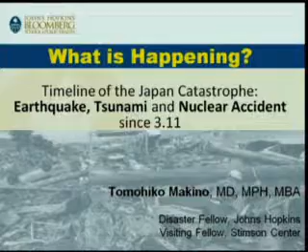I was in Australia when the earthquake and then the tsunami hit, and I was meeting with faculty from Kyoto University. We didn't know at the time what had happened, and after the meeting found, to everybody's shock, what was going on in Japan. From there I went to Taiwan, where everyone was concerned about Japan, but also concerned about what way the wind was blowing. Then I went to China and met John, and we were talking about how, as a school of public health, what are the kinds of things that we can do in these times of crisis. Clearly we have many missions, but one is to present evidence and to do research.

It's a sad irony that our mission is never more important when big disasters happen. So it was that discussion with John, and then I know he talked to people around the school about having a symposium in a relatively short time to talk about what happened in Japan. So today is that symposium.

It was a perfect storm of things going wrong, and that's I guess going to be a theme for what we're going to talk about today: a man-made disaster, a natural disaster, followed by a technological failure. We all know that in addition to the destruction of property and the destruction of lives, the psychological sequelae of people who go through these kinds of experiences are equally significant and something that we have to deal with, and something we've had an interest in the school about.

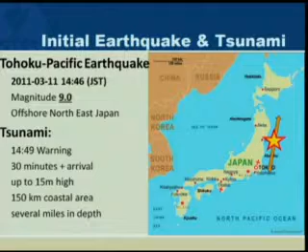This slide shows the real epicenter of the earthquake offshore of the northeast area of Japan, but surveys after the disaster revealed that the real earthquake occurred along a line, not a point, meaning the tsunami was not circular but more like a linear burst with limited attenuation, which enhanced the impact of the tsunami.

This slide shows all the aftershocks of magnitude 5.0 or more, which would be counted as a major earthquake on their own. This is still increasing, and almost once a day this type of earthquake is occurring in this area.

This shows all the epicenters of earthquakes, covering almost all the area of Japan. That distance is about 400 miles, covering all the offshore area - similar to the distance from here to Boston. So most of this large area is still experiencing earthquakes now.

This shows the figures of casualties and affected people. The death and missing count is about 25,000, which is itself very large compared to other major disasters like Katrina with 5,000, or Kobe/Hanshin Awaji in 1995 with 6,000 - still large.

But a police officer declared that the real number is still unknown, meaning so many wiped-out towns or homes exist where no one reports who is missing. So the real impact is likely much more, maybe almost double or triple.

Evacuated people now in shelters is still more than 100,000. It was up to 500,000, but most of them have since identified their own place to live, in hotels or with relatives. The shelters are still quite affected, and the numbers keep being updated because of ongoing investigations.

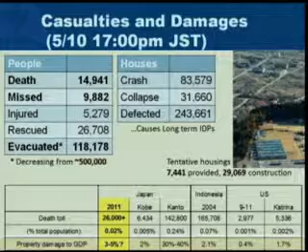This number will indicate how many people will suffer from long-term displacement and need tentative houses or shelters. Some houses are now being built in front of the affected area - the tsunami cleaned up everything, and here's new tentative housing. The numbers are still not enough.

Health issues are also common. It was a very cold winter, and the northeast area is very cold, so the first health challenge was hypothermia and deep venous thrombosis, where evacuated people didn't move a lot. After 1 or 2 weeks, tsunami lung occurred.

Tsunami lung is a kind of pneumonia caused by toxic chemicals brought by the tsunami, or certain chemicals floating around after the tsunami, because the tsunami cleans out and mixes up everything.

Infectious disease was not a focus at the beginning, but it is now occurring. There are hundreds of patients dying because of pneumonia, generic pneumonia. Influenza B is now spreading out, and gastrointestinal disease like norovirus is also spreading.

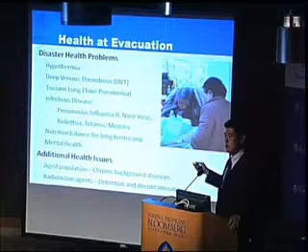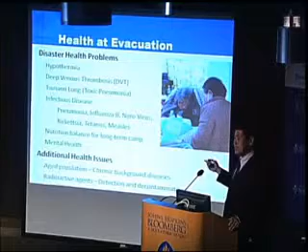These three diseases are a particular concern for volunteer workers supporting from all over Japan to the area, like tetanus and rickettsia - rickettsia being a river fever disease, also notified. Unfortunately, Japan doesn't have measles well-controlled, so volunteer workers are bringing measles to the affected area and spreading it. One overseas media reporter even got measles and kept on interviewing people. So this type of thing is also occurring.

Please imagine all the public health issues ongoing in that area. The nutrition balance for long-term camp is also an issue, meaning most relief materials are composed of carbohydrates - only rice or bread - not well balanced nutritionally. So long-term evacuees need more nutritional care, and mental health is also very important, which will be mentioned later.

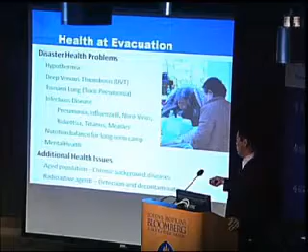There are additional health issues based on the Japanese demographics, which is very old. Japan enjoys the longest life expectancy in the world, meaning good outcomes for public health. But it also means many people are very old, with so many underlying diseases, and these people will need more healthcare in the evacuation stations.

So I hope you will have a vivid image and a more personalized understanding of how people are suffering there.

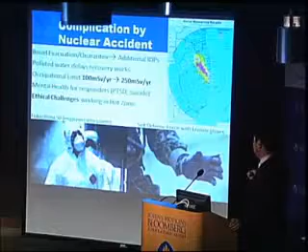And the mental health for the responders - workers, self-defense force - is also another side to be considered. There's an ethical challenge in ordering your subordinates to work in very risky areas with a lot of radiation. These technicians sent to the power plant had so much protection, but they don't have goggles to protect their eyes from internal exposure. And the self-defense personnel had broken gloves, meaning they also need more protection to work appropriately.

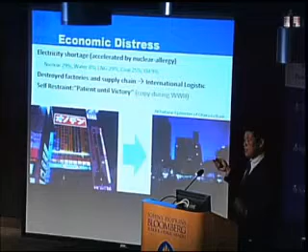And the nuclear power plant defect created a public allergy against nuclear power plants. Not only the defected power plant, but just recently, early this month, the Prime Minister ordered another power plant, located very close to an area with so many earthquakes, to shut down or tentatively suspend, which means electricity provision will be in harder shortage. Japan is now using about 30% of electricity from nuclear power and about 60% from fossil fuels. So this also requires long-term consideration.

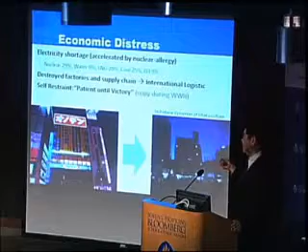Also, the climate change issue and energy security are all included. And affected areas had certain capacities and factories that supported the Japanese economy. This affected additional economic considerations, and people stopped purchasing and consuming a lot, and turned off electricity because of the shortage, and the towns became like ghost towns.

And I would like to mention the international climate. There are so many supports overseas. United States forces did a great job supporting the people, and so many countries expressed their support. There are also private donations, like from Taiwan - so many fundraising efforts - and the U.S. and Korea did the same thing. It's so nice, but on the other hand, regional security is still ongoing.

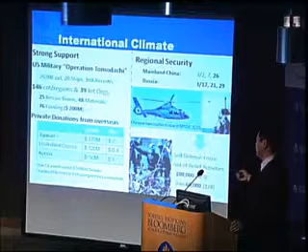So even after the earthquake, there were certain emergent military approaches overseas happening, which led to the decision to mobilize the defense force back to its original duty of defending the homeland country.

These are the big picture issues, but I'd like to reemphasize that all these issues are still ongoing, and long-term consideration will be needed - displacement or reconstruction recovery will take 10 years or more, economy and energy security remain ongoing problems, and radiological fear is another complication. Thank you very much for your attention, and please keep paying attention. Thank you.

As a brief background, this is a print done by a Japanese artist in the early 1800s, named Hokusai, which points out that tsunamis are not new to Japan. These have been going on for centuries in the recorded history of Japan. There have been multiple episodes of deaths greater than 10,000 over the last number of centuries, so it's a common event.

So what I'm here to do is take a little bit of what Dr. Makino talked about and set the stage for the true experts who will talk about details. I'm going to give you a little background about the event and what the meaning of that is in regard to the health and public health context from these events that occurred.

So first we'll talk about the event. I think you know about it a lot, so I'm not going to spend a lot of details on it. But this was not one event, it was 3 events. And so that's why this disaster is very different than most other disasters.

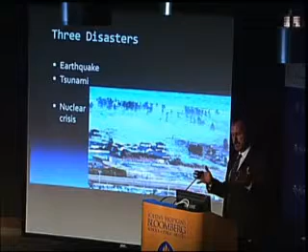If you remember correctly, I happened to be sitting up that night, working late like usual, and I was online with Google News, and it popped up that there was an earthquake in Japan. I immediately started seeing videos of buildings shaking and people running around. But within 30 minutes, the earthquake meant nothing because the tsunami occurred. And it was truly the tsunami, because Japan is pretty well prepared for earthquakes, that was devastating and that changed the entire event into one that then included this nuclear crisis, which is very unique after an event, and yet is potentially predictable in many other settings, including within the USA.

So we have to consider that there are 3 events here, and it's very hard to discern how those different events occurred and what exactly happened to them, because they've all kind of rolled into one.

So just as background, Tomo talked about this. This was a massive earthquake, not only in its magnitude - it was a Richter 9.0, a giant earthquake. But because of what it did, the plates outside of Japan are subductive plates. So the Japanese islands are floating, and the plate next to it is rising above that. What happened is the seafloor actually heaved up, literally heaved up about 5 meters, and then settled about 3 meters up.

So what that did when the floor heaved up is it pushed the ocean up that far. It pushed hundreds of square miles of ocean up meters and meters. And that wave started moving towards the shore across a very long front, like Tomo mentioned - 170 kilometers, 300 kilometers, depending on who you read. So you didn't get this massive, giant single tidal wave, kind of like you saw in Aceh after the earthquake in 2004, but you literally had an ocean that rose up and moved ashore, causing this massive tsunami.

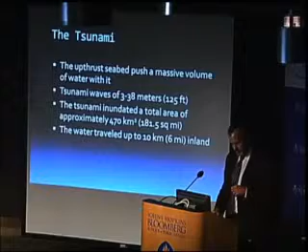The tsunami was measured anywhere from 3 to 38 meters in height, with accurate measures done at different places throughout the coast of Japan along the peninsula - 38 meters, 125 feet in height. For the most part, it was a 10-ish meter tsunami, which is also huge - it's like a 3-story building. But it was a wave, or an ocean - you saw the videos, it just kind of moved ashore and washed away everything. So it was a very unique and different event, with great ramifications.

My job is to discuss the public health and health aspects of this. I'm not going to go into the details about the nuclear aspects because we have true experts here about that. And I'm also not going to go into details about the mental health aspects.

But I want to just set the stage about what the meaning was. Depending on who you read, my numbers are very similar to Tomo's, but not exact. There was a lot of damage, a lot of deaths, and a lot more deaths to come.

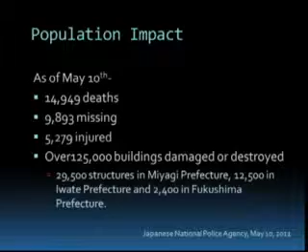The moment I saw those waves coming ashore, that ocean coming ashore, I knew that there were going to be tens of thousands of deaths. You cannot live through a tsunami, and that's what has the most important public health and health implications for us as responders, because the mortality is almost 100%.

As you can see, most of the deaths—so it's hard. One of my research questions was, how many people did the earthquake kill? Because in the Kobe earthquake in 1995, they killed 6,000 people. Right now there's no data available, at least in English, that allows us to separate out earthquake deaths from tsunami deaths.

But the closest I could get was, so far in the recorded autopsy deaths, 92% of them are from drowning. They're clearly from the tsunami. My suspicion is, given the preparedness of Japan and the distance of Tokyo and other major cities from the epicenter, that there's really going to be relatively few deaths directly attributed to the earthquake itself and not the tsunami—in the hundreds, not the thousands.

But I wasn't able to separate that out. That's important for response because it's a different response for the two different events from the health and public health perspective. So for now, we know that about 90+% of the deaths are directly due to the tsunami and not the earthquake itself.

Lots of displaced people, estimates as high as 500,000. Of course, we never know exactly—even in the U.S., no one knows exactly how many people are displaced because so many people go to live with their relatives, frankly.

Accurate counts in shelters did occur in later March, where there were 336,000 people in 2,300 different shelters. So population movements were huge.

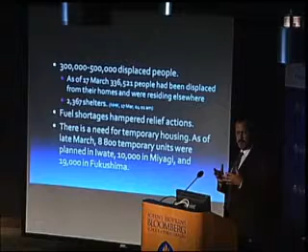The thing about this event that made it exceptionally complex was infrastructure damage. Because of the tsunami wiping out roads and buildings, but also the earthquake destroying power lines, roads, and rail lines, our ability to respond as normal responders was greatly limited because of infrastructural issues—not because of technical expertise or even availability of supplies, but because of the infrastructure damage.

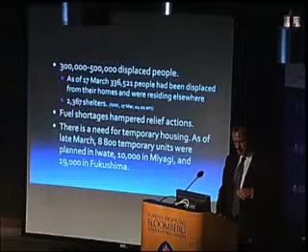There have been attributable deaths after the earthquake, which is also interesting from our point of view because we like to talk about preventable deaths. In one newspaper article I found, there were at least 282 deaths that would have been termed preventable following the event. Seems like a drop in the bucket compared to 25,000 or 6,000, but it's 282 preventable deaths that something could have been done about had we responded differently.

So let's talk about what disasters do, to once again set the stage for this discussion. Generally, we divide disaster effects into direct effects and indirect effects. Speaking as a physician, it's the direct effects that I care about—the injuries, the wounds, the infectious disease, et cetera.

Speaking as a public health person, and I've gone over to the dark side—I'm truly a public health person—it's really the indirect effects, because it's the destruction of infrastructure and resources that leads to long-term morbidity, mortality, population movements, refugee situations, internally displaced people, whatever you like to term it. It's really these indirect effects, the destruction of infrastructure, which causes the massive public health issues, which are, for the most part, truly what leads to the most morbidity and mortality that's preventable, that we can do something about.

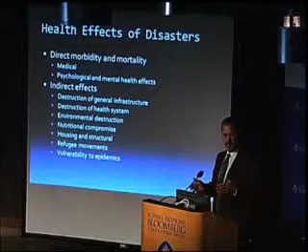So earthquakes are unique, and Haiti is a good example of that. It was estimated that 235,000 people died from the event, and there were 300,000 injuries. That's a wild guess, no one can prove that. But 300,000 injuries is overwhelming for any healthcare situation, let alone in Haiti where there's no healthcare available. In Japan, because of the building structures, the injury rate was much lower. But with tsunamis, because they come ashore, they kill everybody. So there's really limited emergent medical care needed for these events, and you have to keep that in mind because it changes our response.

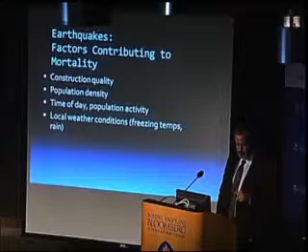So it's all about construction quality. So what do earthquakes do? Earthquakes—because if you're in the middle of an earthquake standing in a field, no big deal, you might fall down and sprain your ankle. It's buildings that kill people. And so the injuries are severe: fractures, lacerations, and all the things you'd expect in a war setting, basically. So there's a tremendous medical need from that.

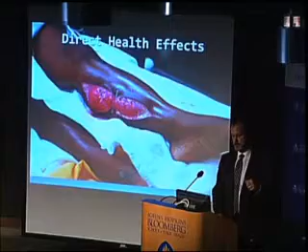The indirect effects, the secondary effects—because they cause such disruption of the infrastructure, loss of buildings, loss of critical infrastructure like power, water, sanitation, all the things essential to our civilization, essential to us to live—the indirect effects are very large and devastating also. The other indirect effect is the economic impact of earthquakes, which is tremendous. It affects the GDP, the entire economy of a country, by percentages unlike any other disaster, where you have a very small blip after it. But earthquakes, because of the infrastructure damage, cause long-term, decades-long impacts on countries' economies.

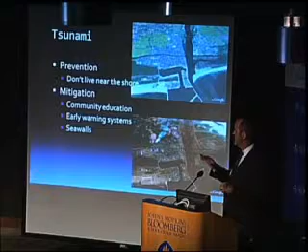Tsunamis—the only thing I want to summarize on tsunamis, and I think these pictures do it, is that you don't live through a tsunami, basically. So the prevention is don't live near the shore, obviously.

Seawalls—Japan has spent billions of dollars building seawalls. All of them, because of the size of the tsunami, were basically overrun. And maybe seawalls are not good because they cause a false sense of security. They have evacuation shelters too—it's estimated that in Japan, up to a third of the tsunami evacuation shelters were inundated by the tsunami itself. So the question is, do those things help, or do they provide us a false level of comfort and maybe make things worse, at least for massive events like this?

This was a massive event. Early warning systems clearly are a critically important thing in tsunami response. There are buoys scattered throughout the ocean. If you go to the National Oceanic and Atmospheric Administration, they have lovely maps of where all the buoys are.

This occurred 30 miles offshore. There was no chance for these people to evacuate. They were still busy after their houses had shaken and half fallen down, just trying to recover from that. And there was really almost no chance for them to evacuate from those areas because the tsunamis hit so fast.

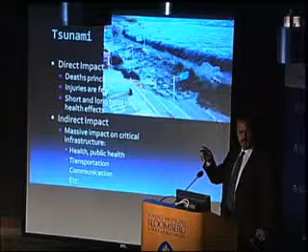So the direct impact of tsunamis is you die. If you listen carefully to the search and rescue issues over the course of the time frame, there was this famous rescue of the grandmother and her teenage grandson. Did you hear any other live rescues after this event? There really weren't many, because you don't survive a tsunami. And so the medical impact is once again limited. There's very few things that I as a physician can do.

There are lots of things that I as a public health provider can do. These are some of the types of things I wanted to briefly mention in the health response to disasters, and then we'll be done. First, we'll talk about public health. I'm not going to go into details here.

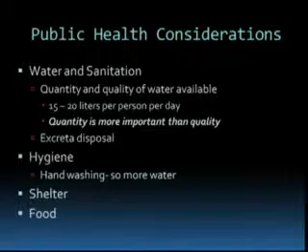This event displaced 500,000 people, essentially the same number of people that were displaced after Katrina. This creates tremendous public health issues that Japan struggled mightily with because of the transportation and infrastructure damage. For the first week or so, many of these spontaneous shelters that arose did not have access to sanitation and water and food and the things that are essential because of the lack of infrastructure and the lack of ability to deliver these things. We often talk about the need for communicable disease control after disasters.

It is a big deal in less developed settings. It's not a big deal in the U.S. and more developed settings, because the infrastructure is there, particularly immunizations, that prevent vaccine-preventable diseases, but there's better infrastructure to prevent diarrheal diseases, et cetera.

There were reports in Japan of this, however. Disposition of the dead bodies is important, and after events that kill tens of thousands of people, we ignore all of these standard rules you're supposed to use. In Japan, rather than cremate people, there are mass graves, et cetera. And so that is a big health effect, a health important thing, but we often have to violate our own precepts there because of the need to do other things.

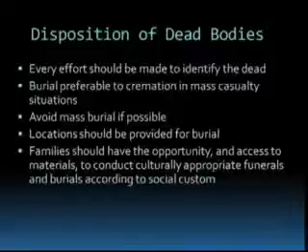I just want to touch on search and rescue. There were 40-some search and rescue teams that were deployed to Japan. Search and rescue teams from a global setting usually can't start functioning for 24 to 48 hours. The U.S. team deployed like usual, 2 teams. They made no live rescues. The ability for any global search and rescue teams in these situations to actually save lives is essentially zero, particularly after tsunami.

Haiti was a little bit different, in that there were 117 live rescues made in Haiti at the cost of about $2 million per rescue. But that was different because of the proximity to the U.S., and because it was an earthquake with structures that were kind of crummy structures, and so there were fewer deaths directly from those. And so the search and rescue issue in a humanitarian response, in my mind, is something that's not useful, and that we should probably stop, but we do it anyway.

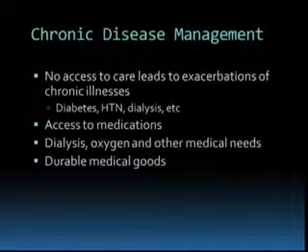So we're going to move through these. In an event like this, in an event like Haiti, it's really the long-term medical care that becomes a big issue. Once the acute phase is gone, in this case, which was very short because there weren't that many injuries, the ability to provide health care to these 500,000 displaced people, with the loss of the health centers, the doctors, the nurses, the pharmacy supplies, et cetera, is an issue that is going to be ongoing for months. Those with chronic diseases, those with hypertension, dialysis, et cetera, need care or they're going to die. And so provision of basic medical care is the most important thing after all of these disasters.

Mental health, I'm certainly not going to talk about, because I'm not an expert.

So I just wanted to summarize very briefly. Even though I am a physician, even though I'm an emergency physician, I've gone over the dark side. It's the public health issues where we have to put all of our focus, where all of our efforts after disaster have to go into. If we're going to provide medical care, it has to be chronic care. It has to be provision of primary health care services like are done in all basic levels, all basic countries. And so just keep that in mind.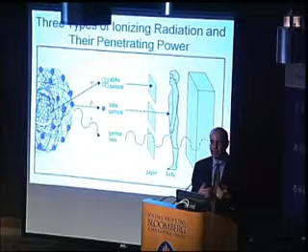So from a public health perspective, how do I think about this? If I have alpha particles and beta particles—radioactive atoms emitting particulate ionizing radiation—my key job is to keep the radioactive atoms out of my body. If I have X-rays and gamma rays, so the radioactive atoms are emitting electromagnetic ionizing radiation, then keeping the radioactive atoms outside my body is not going to do the full trick, and I need to think about reducing my exposure through distance, shielding, and so on.

So how does that then translate to the situation in Japan?

There are two possibilities for how you get irradiated: the radiation is either outside your body and impinging upon it, or it's emitted inside your body. For external radiation, where the source is outside your body, the greatest risk is from X-rays or gamma rays that can penetrate into your body.

Who's really at greatest risk there? It's the power plant workers. Tomo showed you a picture of those workers with masks and Tyvek suits, but that does not shield you against external irradiation from X-rays and gamma rays.

At one point in the unfolding of the event, the radiation dose rate inside the power plant facility was so high that 800 nuclear power plant workers were evacuated, and 50 were left to make sure that the pumps, which I'll talk about in a minute, kept operating. I see nodding heads, everyone remembers that.

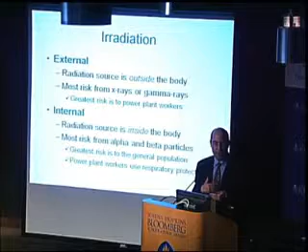Well, what about the 50? They weren't walking around in giant lead suits, right? I actually think it's amazing that hardly anyone in the media talks about those 50 who received very high doses, in essence coming as close to a suicide mission as possible to protect everyone else. So in a case like that, you really have to think about the workers.

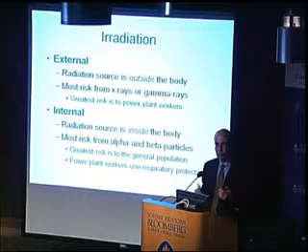I was also struck by Tomo's slide, because in the midst of an event like that with releases, a mask isn't enough — you really need a self-contained breathing apparatus or other active respiratory protection. But the Tyvek suit and mask are preventing internal contamination, which is still worth it, because the last thing you want is to walk away from the source carrying radioactivity with you, still irradiating yourself.

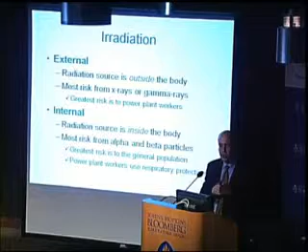But for those power plant workers, the external irradiation was very, very significant. On the other hand, in the internal irradiation scenario, where the radiation source is inside the body, I'm much more worried about alpha and beta particles than about X-rays and gamma rays.

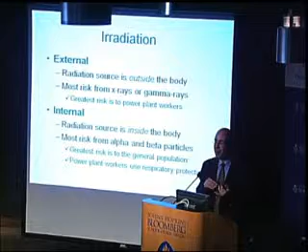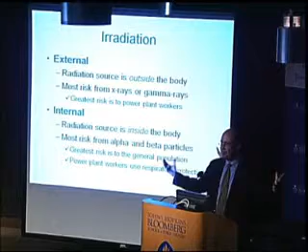The greatest risk there is to the general population, who are typically breathing it in or ingesting it. And the power plant workers, ironically, even though they're right there on site, have a lower risk than members of the general public in some vicinity to the plant, because of the personal protective equipment the workers are wearing that the public is not. So it's this kind of paradox we have to think through.

What's going to happen either to the power plant workers or to members of the general public who receive radiation doses? Broadly speaking, there are acute effects and delayed effects. The acute effects include what's called a prodromal syndrome — the stereotypical thing you hear about with acute radiation exposure: nausea, vomiting, diarrhea, fatigue, and so on. Then there's one of three different syndromes that occur acutely depending on your dose.

Here I've expressed doses in rem, a very conventional unit of dose, and you'll notice those syndromes occur at hundreds, thousands, or tens of thousands of rem. By way of comparison, every year all of us involuntarily pick up roughly, in Baltimore, 300 millirem of radiation dose.

That comes from cosmic rays, radioactivity in soil, building materials — our own bodies are radioactive, so we're irradiating ourselves, and so on. So these acute-effect thresholds are many-fold higher doses than what we normally receive.

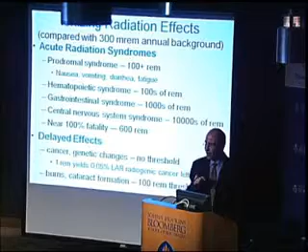From a public health communications perspective, it goes back to this notion of the word radiation and the inflammatory nature of the word itself. If cancer is the endpoint I'm worried about in terms of public exposures, and if from a public health practice perspective I cannot say there's such a thing as a safe dose, then my risk communication becomes very challenging, because the public doesn't want to hear your risk is low. They want to hear you're safe, which means zero risk.

In a conventional fossil fuel power plant, I'm burning fossil fuels, and that's giving me the heat to boil the water. In a nuclear power plant, I have nuclear fuel in a reactor, undergoing a nuclear reaction called fission, where an atom splits apart into two fission products. When that atom splits apart, a lot of energy is released. Some other nasty stuff is released as well, but a lot of energy is released. Much of that energy is thermal or heat energy, and that's what's boiling the water.

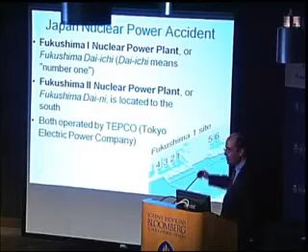1, 2, 3, and 4 — the major part of the story. We had the big earthquake. Units 4, 5, and 6 had been shut down prior to the earthquake, so that was a controlled shutdown with decay heat. The remaining reactors shut down automatically with the earthquake. That's the good news, but you still had heat.

That heat was taken away by the pumped circulating water with the emergency generators. That was good news for 30 minutes. Then you had the failure of the emergency generators.

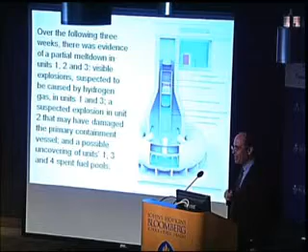Over the following three weeks, there was a partial meltdown in units 1, 2, and 3, and that slide gives some of the evidence for it. In unit 4, you had spent fuel that also became a problem because it's still radioactive — it's still giving off heat, even though it's fuel that is not in the configuration of the reactor core.

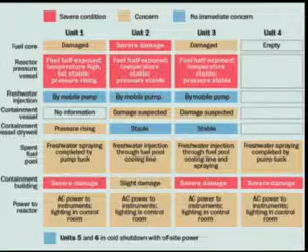So what you ended up with is a series of conditions in units 1, 2, 3, and 4 that had to do with a buildup of reactor pressure, some damage to the containment vessel itself, the containment building — that's when you're really going to get releases to the environment because you get a buildup of radioactive gases. If you have damage to the containment vessel and the containment building, that's when you have your opportunity for release into the general environment.

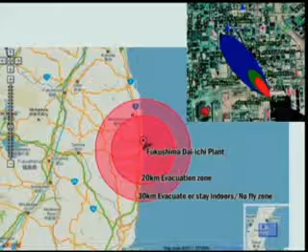You heard about the evacuations, and in fact there was a lot of controversy about what's the proper radius for evacuation, because the evacuations were over a shorter distance than we would do in this country. Part of the challenge is we always draw these nice concentric circles, but as was said with respect to the tsunami, it actually applies to air modeling with a plume. If you model the release of radioactivity into air, it travels in a very directional pattern with respect to the wind. So which direction the wind's blowing is incredibly important.

You've probably also heard that on the International Nuclear Event Scale, ultimately this was a level 7, a major accident. That's because of what happened in aggregate across units 1, 2, and 3. Of interest, the first INES rating was a 5. Why did it go up to a 7? Because there was a lot more release? No — because there was a decision made to combine the releases from units 1, 2, and 3 rather than counting each of them separately. Makes sense, I think.

Okay, what are the radionuclides that get released? Iodine, cesium, strontium, and plutonium. The big ones in Japan — iodine by far, and then some cesium. It's the iodine that got all the attention, and that's because we have some interventions for various internal contaminations, and potassium iodide is the one for iodine releases. It only protects the thyroid, and it only protects the thyroid while you're taking it. So actually there was, I think, as usual, a lot of overselling of the iodine story.

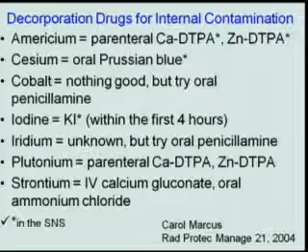Let me end by talking a little bit about perception of risk, because I think this is a key component in all disasters, and particularly in a disaster like this that involves a radiologic component. To me, the guru of risk perception is a psychologist named Paul Slovic, who decades ago basically said that the characteristics that drive human perception of risk fall into two groupings: one has to do with how dread the risk is — is it uncontrollable, is it fatal, is the situation catastrophic — and a second has to do with how unknown the risk is.

So do we know that we're being exposed to radiation right now? No, we can't sense it, and we are being exposed to radiation right now. The effects are delayed — cancer has a latent period of decades, and so on. So if you think about it, ionizing radiation has all of the characteristics — I'm just a bundle of joy, aren't I? — ionizing radiation has all of the characteristics that drive perception of risk.

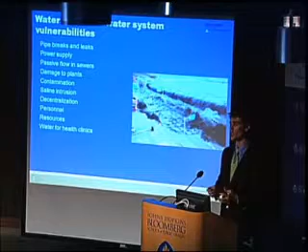There's passive flow of water in sewer systems. Sewers are gravity fed, and these are generally open systems, so during flooding situations they become in contact with surface water. There's damage to plants, there's contamination release, so groundwater can intrude into the water supply. There's saline intrusion after a tsunami, so salt water can ruin your crop fields for decades to come.

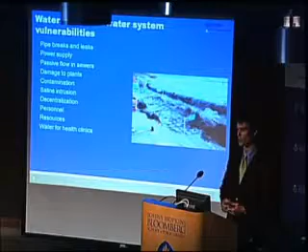There's decentralization of water systems—the way these are organized can become problematic, so whether you have one large plant or many small plants becomes an issue. There are personnel issues after any disaster in any sector, and resource limitations. Water is critically important for healthcare following this—you need clean water to do surgery, clean water for patients, etc.

So what I'm going to talk about today is give you a little snapshot of what happened after a major earthquake in 1995. There was a bit of a wake-up call. We'll discuss that in the context of what it takes to be prepared for a major event like this, give you an introduction to the water supply and sanitation in pre-tsunami Japan, what happened after the disaster—post-tsunami—and some data gaps and opportunities for Johns Hopkins.

There was a major earthquake in 1995 centered around Kobe, a major city. The reason I bring this up is not because it was a big earthquake with respect to the numbers of people who died—there were 6,300 people, which is a lot, but still much smaller than today's event.

What I wanted to focus on was that there were 3,300 pipe breaks following that earthquake. This was an unprecedented number of breaks within Japan, with a really high breaks-per-kilometer rate. What this led to was the inability to fight fire—so you have these coupled problems.

You have the problem of water supply, which leads to an inability to fight fire. There was a lot of loss of homes, $100 billion in property damage, and a long time to recover following that event. So I want to focus on the timeline to recovery following this 1995 event.

Electricity was up after 6 days. Telephones, 14 days, not so bad. Gas, much longer, 84 days. Water, 3 months—it took 3 months to get full water coverage throughout the city and surrounding areas, and this also applied to sewers, about 3 months. So this was a bit of a wake-up call that we weren't really prepared from a water supply perspective to address these disasters.

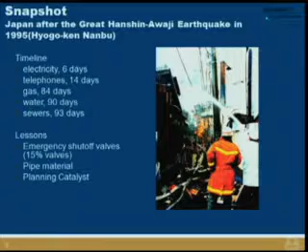And so all of those little mini lessons developed into this idea that there needs to be a better nationwide plan. And so this was a catalyst for action. Okay, so all that culminates into a water safety plan.

The water safety plan is the dominant management tool for the water supply across a country. So this is how countries are starting to look at their water supply from a daily basis as well as from a disaster preparedness basis.

The water safety plan is a comprehensive risk assessment and risk management based perspective to protect water from the source to the consumer. So on a daily basis, you look at areas which may be at a higher risk for Cryptosporidium, which is a pathogen, and you have a different plan to control the water supply in that region with respect to a region that doesn't have a problem with Cryptosporidium.

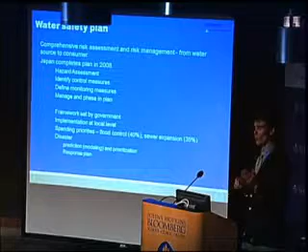Japan completed their water safety plan in 2008, and the basic components are, very simplified, to identify the hazards, so that would be things like earthquake, where are the pipes more vulnerable, where the earthquake's likely to happen, and which pipes are going to break.

Then you identify control measures. So that would be things like we're going to replace those pipes, or we're going to have bypass valves or something like that, so that if this pipe breaks, this other one's still working.

And then you define monitoring measures to make sure that the system is working. You manage this plan, you implement it, and you iterate. So it's kind of this iterative process.

That framework is set by the national government, but it's implemented at the local level. And there are many players in between, which is what we're going to see happen after the earthquake and tsunami.

And so the spending priorities right now in Japan are things like flood control, it's about 40%, and sewer expansion. Japan historically has a low sewage network coverage, so there's a lot more home treatment systems. And about 35% of the national water budget is related to sewer expansion.

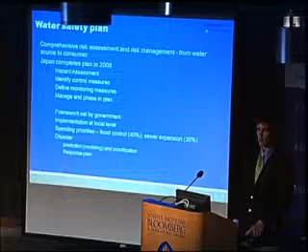From a disaster perspective, they're most focused on prediction, so that would be modeling where the disasters will occur and prioritizing the changes to water and sanitation infrastructure based on those results, and developing, again, the plan.

That's the software. Okay, so here are just some examples of things that you can do to develop better hardware to deal with disasters. So for an earthquake, seismic capacity improvements. So that's the obvious stuff: pipe material, joint material, structural improvements to the facilities. So that's the treatment plants themselves.

You also want, and I think this is clever, a seismic resistant power supply. So you have this redundancy built into a cogen plant. You have your natural gas, so if that system is up and running, you can still provide water, but you also have tapped into the greater electric grid. And so many water plants have developed their own cogen electric plants on site.

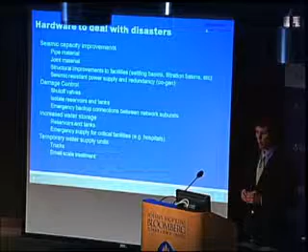There are also damage control measures. So the emergency shutoff valves that we just spoke about. You can isolate the different tanks and reservoirs so that they aren't all connected and they don't all drain at the same time when the system starts to open up. And you want to have emergency backup connections, so that's redundancies in pipes. So if this neighborhood has one pipe that goes into it and that pipe breaks, none of those people get water. So they like to build in these sort of redundant systems.

We also increase water storage. So that means bigger reservoirs, more tanks. And it's critical to put water in very important facilities like hospitals. And that's just a special case of increased water storage.

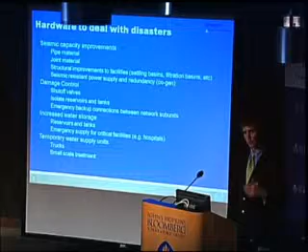The last thing I wanted to mention is temporary water supply units. So in Japan, they used a lot of water trucks. But in other places, you can use small-scale water treatment.

Before the tsunami in Japan, they have a lot of pipes. This is expected because it's a highly developed country. There's 610,000 total kilometers of pipes, 16,000 plants across the whole country. Unfortunately, seismic resilient materials are expensive, so only 6% of pipes are ductile iron and 3% are steel, because steel is a lot more expensive than concrete. So only 9% of the pipes throughout Japan are resistant to earthquakes, and the entire country is at high risk for earthquakes.

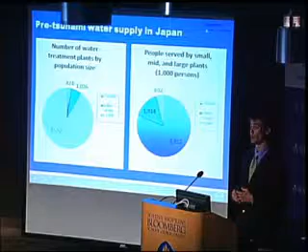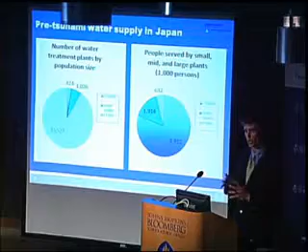The capacity of the reservoirs is going up across the country, and the majority of plants are small scale, but the majority of people receive their water from large plants. Shown here is a pie chart describing who gets their water where. On the left, we see the number of water treatment plants by population size. This light blue area, 15,527 plants, are treating populations between 100 and 5,000 people. So you have a lot of little plants scattered around everywhere, and that's to be expected. And you have a very small number of plants which treat large populations - only 424 plants provide water to 50,000 people or more. This pie chart is a little bit skewed towards the small distribution side. The U.S. would have bigger chunks in the middle and at the top end, but still most people are getting their water from those big plants. If you look on the right, you have about 10 million people who get their water from those 400-some-odd large plants. And that's something that becomes important in disaster planning.

The pre-tsunami sanitation situation falls under the purview of a different department, and so there's a real data gap about what's going on in the sewers because these two departments don't report their information in the same way. 72% of Japan has sewer network coverage, compared to about 84% in the U.S. This is predominantly a new phenomenon - in the last 10 years, Japan has risen from below 60% to over 70% sewer coverage. That means all of their pipes are much younger - the average age of the sewer system in Japan is 16 years compared to 40 years in the U.S. That means we're going to be spending a lot of money fixing these pipes because they're going to be breaking and we're going to have problems with our sewers. There are 410,000 kilometers of sewers in Japan - again, that's a big system. And most of these, even though they're new, are still low seismic capacity.

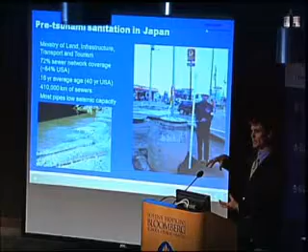Here's just sort of two extremes of what can happen following an earthquake. This is a 2004 earthquake, and you see a manhole here has lifted. These systems get jostled around during the earthquake, and this is very likely to be fractured underground. The other situation is that water can flood over the sewer system, and there's a manhole that has surface water directly in contact with the water inside of the pipes. So that's a public health risk right there.

In comes a tsunami. Again, this is the area we're interested in.

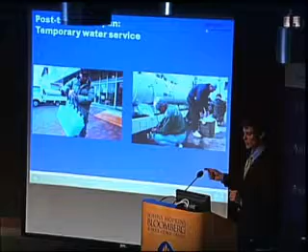You have 300 trucks ready within 4 days to provide water, and within 20 days you have some 500 water tanks ready to go. It's interesting to note that not all of them are in service, and this reflects the dynamic nature of the problem. As trucks would go online in areas that needed water in the beginning, and then their normal supply would come into effect, they wouldn't need the trucks anymore. So you had this very dynamic situation.

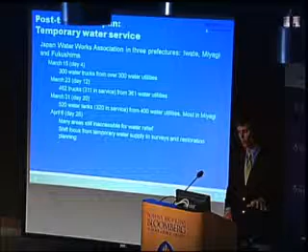By early April, there was a shift in focus from this temporary water supply to surveys and restoration, even though there are still some areas that are inaccessible for water relief.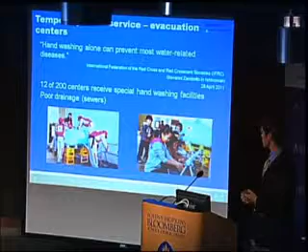The third temporary water service that's critically important is water within these evacuation centers themselves. Tom had alluded to this, that there was an outbreak of diarrheal disease in some of these facilities. The reason was that there wasn't sufficient hand washing going on, because the sewer systems were backed up and water was not being drained properly. So the Japanese Red Cross promoted hand washing as the intervention, and developed these small tanks to pilot a hand washing station for children so everyone could wash their hands and try to control the disease. One thing I was really interested in figuring out was how widespread this problem actually was, and whether or not this was an effective control measure. There's a real lack of information coming out of some of these sites.

Okay, temporary water service - I showed you some examples of how we can handle that. We want to restore the normal service, and that involves getting our pumping stations back online, fixing pipe breaks, and so on.

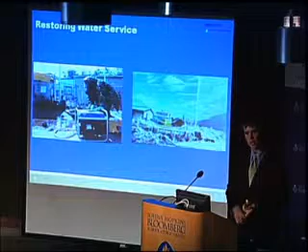On the left, we have a pumping station that's inundated with water, and this guy here is from the U.S. military. He has a small generator and he's trying to pump water out of the surface water. The picture on the right is a pipe burst - it's a surface pipe, there's water spewing up into the air. It's coming down and it's cold, so it's freezing, and that presents all kinds of challenges in trying to get that leak fixed.

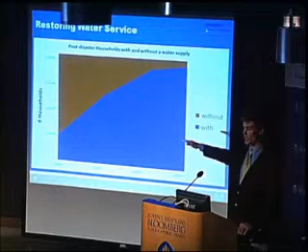Okay, so this is a real success. Remember, 90 days following the earthquake in 1995 - within a month, you went from a situation where 75% of households did not have water in the affected region, to over 90% of households. That's a really quick ramp-up phase, and that's in large part due to this shift in water safety plans and a focus on disaster response, trying to get these different teams coordinated in a more consistent fashion.

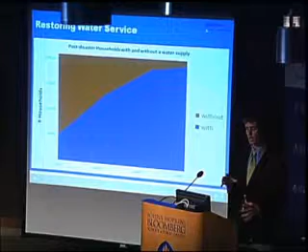So although all of these homes have volumes of piped water, it's not clear how pure that water is right now, for two reasons. One is that during the pipe break event, there can be intrusion of groundwater into the pipes. The other is this problem with radioactive contamination in water.

As these households were getting brought online, there was the discovery that there was radioactive material in their food and water supply. We've already spoken a little bit about this, so I'm not going to go into great detail, but this radioactive iodine and cesium, which was released, gets trapped into rain particles as they come down and are brought into the treatment distribution system.

This becomes a concern if the concentrations are above 300 becquerels per liter of iodine, or 200 for cesium, for adults, and 100 becquerels per liter for infants.

Tokyo responded to this by distributing a lot of bottled water. This is not a sustainable solution, but it was an emergency plan to try to deal with something that was unforeseen at that time.

The tap water restrictions, which took place during the first part of the tsunami, were lifted within a short amount of time, and the last one was lifted yesterday. In the 80-some-odd communities where they found radioactive iodine in the water, most restrictions on drinking were lifted within the first few weeks, and today all of them are lifted.

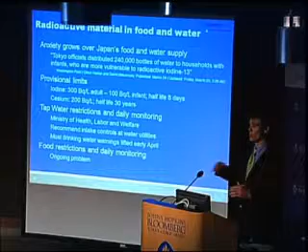The other control measure to deal with this radioactive iodine problem was to either cover or shut down the water treatment plants during rainfall events. And it rains a lot in Japan at this time of year, so that becomes a real problem.

The food restrictions have a similar origin. This atmospheric release of radiation gets into the water supply, gets taken up into growing plants and incorporated into their tissue. So this is an ongoing problem.

Just yesterday they found new sources of radiation in the bamboo shoots and mushrooms in one of the prefectures, and previously there have been contaminated apples. This is something the government is doing a good job of monitoring and reporting. From a public health management standpoint, at this stage, given that radiation is released into the environment, monitoring the food directly is the best approach.

I'm going to conclude with a few data gaps and research opportunities, because that's what we do. The Global Water Program at Johns Hopkins — most of us here are academics — I think there's a lot of room to discover new solutions related to these key data gaps.

One is water-related disease. There wasn't extensive reporting yet of chronic illnesses, or diarrheal illnesses and things like that relating to the water supply, or contaminants in home taps. All of the data I was able to find were water quality data coming out of treatment plants, not out of people's homes. Between the plants and the home, there's the risk of additional contamination.

What we try to do is three things. I want you to think about three words - you can write these on the back of your hands. This is what my field is all about. It's pretty pathetic when I stop and think about it, but this is what I do. Stabilization - we try to stabilize, to keep things from getting worse. Mitigate - can we do something to make it a little bit better? And facilitate - facilitate access to the next level of care when such things are truly available.

Oh, okay. I don't know why it's doing this. It's just kind of neat, I guess. I hope it's not going to keep doing this.

What is the state of the art in disaster mental health? Very similar to physical health. I want you to think of a continuum of care - it's not a one-off-the-shelf implementation, not just establishing a crisis telephone hotline. And I cringe when I hear this, but every time something happens, certainly in North America, you'll hear the line that grief counselors were dispatched, and I get this image of Winnebagos with little yellow smiley face flags heralding off to the site. That's not exactly what we do, but telephone hotlines certainly are part of the continuum of care. We also talk about mobile crisis outreach, holding town meetings, surveillance, assessment in the field, and facilitating access to the next level of care, whatever that may be. So a continuum of care is a very important concept for us.

I want you to think in terms of stages of disasters. Part of the art form when we deal with any continuum of care is choosing the target population and choosing the right tools for that target population. For example, think of segmenting a target - we have school children, people working at nuclear plants, civilians, farmers, people who work in cities and on farms. They may be arguably distinct and separate target populations, and different tools will be used for different populations.

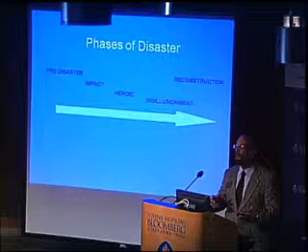This concept of phases of disaster suggests that timing actually makes a difference. So what I'm going to do is take you on a very quick sojourn through the notion of what to do and when, from a strategic planning standpoint.

So, pre-disaster. Now, hindsight's 20/20, but if we know that we live in a high-risk venue or area, or if we know we're working with individuals we put at high risk - we talk about sending EMTs, firefighters, police officers, and urban search and rescue teams, for example, who certainly did respond to Japan. We talk about the military - we know that we put these people in harm's way. So either by their occupation, their response functions, or perhaps where people reside or work, they may be at high risk. In the pre-disaster phase, what can we do to instill some sort of immunity, psychologically or behaviorally? Well, the tools we've identified so far are training - specific training in what the threat may be and how to respond to it - and preparing. If you remember Rudy Giuliani, politics aside, one thing he said is that relentless preparation was the key to ultimately surviving 9/11 and coming back online as quickly as they did.

The impact phase - what do you do there? What is the mental health function there? Information. People crave information. In my experience - and I've responded to disasters in 22 countries over 30 years - the irony for me as I was thinking about this talk is that I responded to floods, I responded to earthquakes, and I responded to radiologic disasters, but I've never responded to all of them at once.

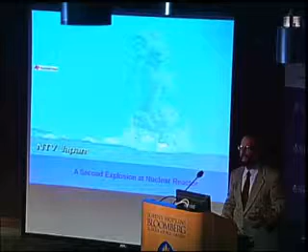We've heard of how this has complicated matters, but I'm also reminded that like terrorism, the unresolved, the unseen, the ill-defined takes a greater toll on the psyche than what you can see and measure. So my concern is the radiologic effects will have more of a psychological detriment to the population than perhaps a physical one.

We entered the disillusionment phase. People take stock of what's left—this is what we lost, this is what we have. Most people are thankful for what they have, but invariably they bottom out. So this is the disillusionment stage.

We provide information, social reunification. We play the role of advocate and liaison, and psychological crisis intervention. These are the tenets that have been taught since World War I. We know they work—study after study tells us that the simple principles of proximity, immediacy, and expectancy can help people return to functionality.

In World War I, in the absence of these principles, only 5 to 10% of people were returned to combat. With these principles, 70% of people were returned to functionality in combat.

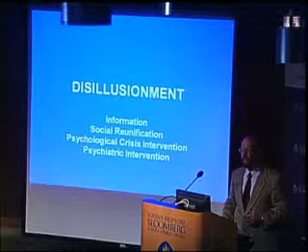Psychiatric intervention is sometimes needed. We sometimes forget that some people have already been prescribed psychiatric medications, but they're gone. So one of the best things we can do is simply do the assessment and renew those prescriptions.

The psychological first aid that I mentioned earlier is recommended by the World Health Organization, the Institute of Medicine, and NIMH. What we did here at Hopkins was very novel, however. Our psych first aid program was geared to non-mental health clinicians, where every other extant program was geared for mental health clinicians. Our notion was that people on the front line are your first line of resistance.

Recent evidence suggests that anywhere from 9 to 25% of a directly affected population will need direct psychological support. But that support may be provided not by clinicians as much as by people trained in psychological first aid. Part of our job is to anticipate surge, but also to respond by enhancing surge capacity. The model we use here at Hopkins, I think, is the best in the world at doing that.

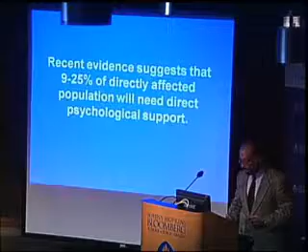Evidence also suggests that psychological crisis intervention is actually superior to traditional counseling and psychotherapy, and that may come as a surprise to you. Probably the best single study that came out of the World Trade Center was conducted by the New York Academy of Medicine, and they found that simple crisis intervention services enhanced and facilitated recovery, seeming to be associated with less post-traumatic depression and post-traumatic stress disorder.

Now, you're sitting down because this one takes your breath away. They also found that counseling and psychotherapy done in the acute phase was not only inferior to crisis intervention, but appeared to exert an adverse iatrogenic effect—it appeared to be toxic. In fact, in a dose-response relationship, the more psychotherapy people got, the worse they got.

And reconstruction, leadership, again, is an imperative. Establishment and support of social networks. Continued crisis intervention, as indicated.

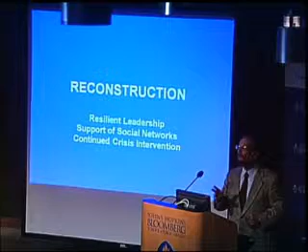I was privileged to serve Rudy Giuliani in New York. One of the first questions he asked me, four days after the buildings came down, was what's my catchment area — he said, of 10.5 million people — how many people are going to need help? We were able to make some estimates on that. But one thing I also explained to him was that the trajectory for the civilian population will be very different than the trajectory for the first responder population. I said I have very low concerns for the responders until you close the site, and that's when you will start to see psychiatric manifestations there, and counseling then becomes very appropriate.

I was honored to help the country of Kuwait recover after the first Gulf War. In fact, I helped build their mental health system. And in my final address to the Kuwaiti parliament, I said something very simple: you have all the money that's required, you have reconstructed the infrastructure, but until the population feels the desire to recover, to rebound, to be resilient, the country will never recover.

In effect, I agree with Selye: it's not what happens to you that matters, it's how you take it. Thank you so much for your time.